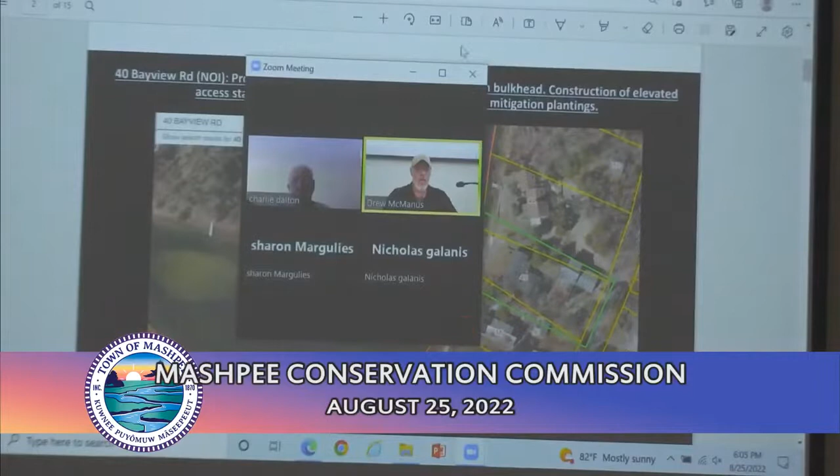I will call to order the first hearing, the 6 o'clock hearing for Kevin and Christine Granfield, 40 Bayview Road. This is a proposed removal of an existing timber wall and replacement with a new vinyl sheet pile wall or approved equal from lot line to lot line, landward of the existing salt marsh and mean high water line, following the original existing wall toe alignment, and to reestablish grades behind the wall with 180 square feet of creeping junipers planted 2 feet behind the new wall.

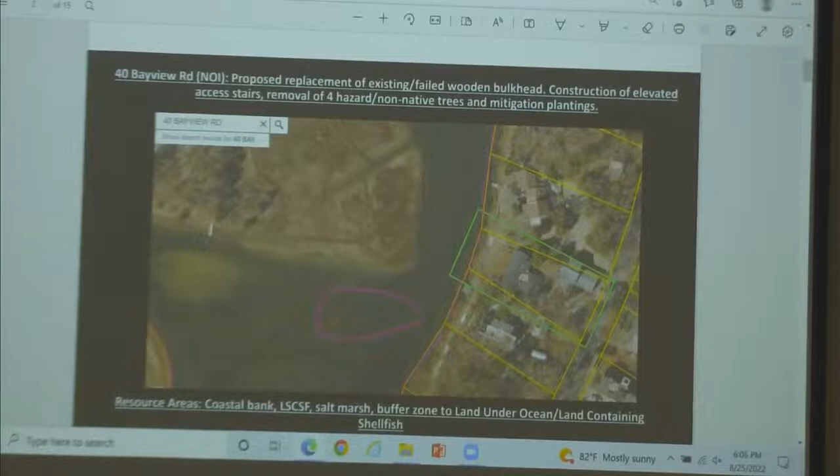All work is above the mean high water. Additionally, remove existing landing, remove and reset ramp, construct and maintain a 4-foot by 20-foot proposed access stairs and landing with utilities supported by a 4x4 post. Remove 2 spruce trees, 1 Norway maple, and 1 pine tree. Representative is Cape and Islands Engineering. This is an NOI. Good evening, sir.

For the record, Raul Lizardi from Cape and Islands Engineering, representing the applicant, Mr. and Mrs. Granfield at 40 Bayview Road. First, I do want to say that there is a notice of intent number issued for this permit. Number is 43-3200.

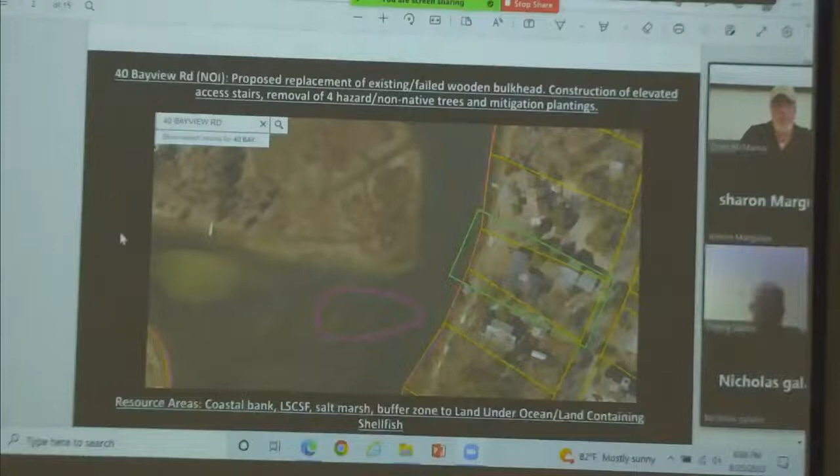This project, the main work is for the reconstruction of a timber bulkhead. For those of you who were at a hearing a couple of years ago, we did a similar reconstruction of a timber bulkhead for the abutter just to the north. So this abutter now to the south, and this application is to continue what was done on the neighbor. These two properties used to have a joint bulkhead.

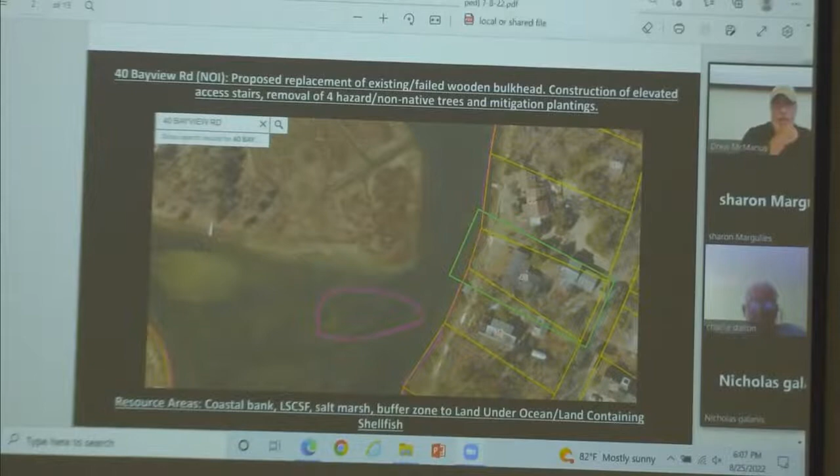It was timber, and after 30 or so years the timber has been deteriorating, and there are sumps or sinkholes happening behind the bulkhead. The bulkhead does not reach mean high water, so this is all happening above mean high water, but there is a salt marsh that comes all the way up to the bulkhead.

The proposal here is to deconstruct the existing timber bulkhead and in its place install a vinyl sheet pile bulkhead with tiebacks every 10 feet. It's similar to the design done to the north. The only difference is the project to the north used what they call the box vinyl sheet piles.

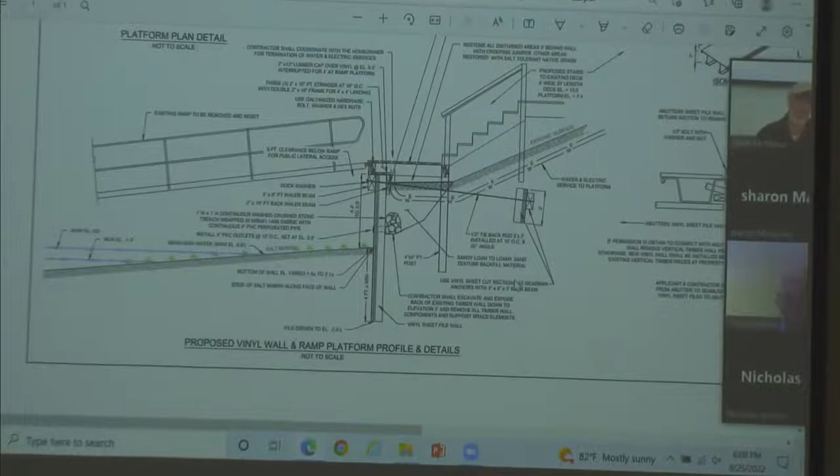Those are the ones that have a corrugated look to them. This neighbor wants the flat face vinyl, so it will look like a straight wall along the front of the bulkhead. In addition, they have an existing 10A permitted float, with a ramp going from the existing top of the bulkhead to that float.

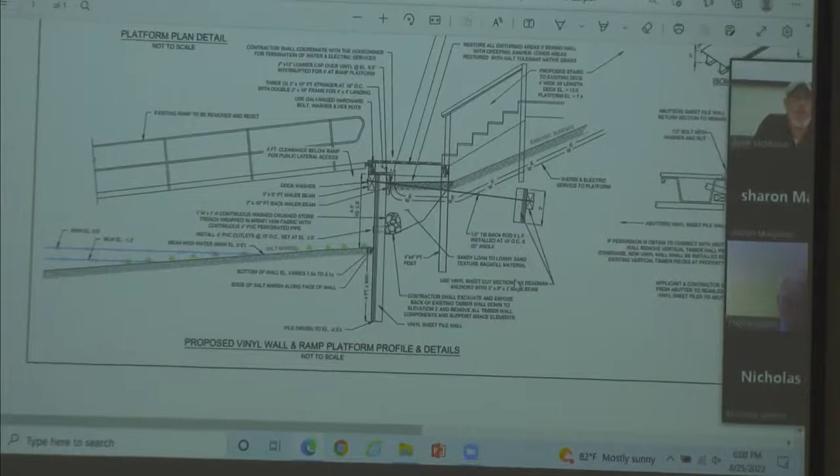What we want to do is reinstall that ramp on top of the new bulkhead, and then towards the existing house, instead of having the homeowners walk down the slope, which is a coastal bank, have an above grade stairs to access from the deck down to the ramp and eventually down to the float.

A couple of improvements also proposed is the removal of the Norway maple that is compromising the house, and there's actually two structures on the property, 2 spruce on the property and a pine that's very close to the house.

There's 2 downspouts on the 2 back corners of the existing house that currently discharge to surface. What we're proposing is to intercept those 2 downspouts with 2 dry wells as an improvement to lessen the amount of runoff going down the bank.

And the first 2 feet behind the new constructed bulkhead, we're proposing to install native junipers. The junipers not only add natural vegetation to this buffer, but also help slow down any runoff making it down to the bulkhead.

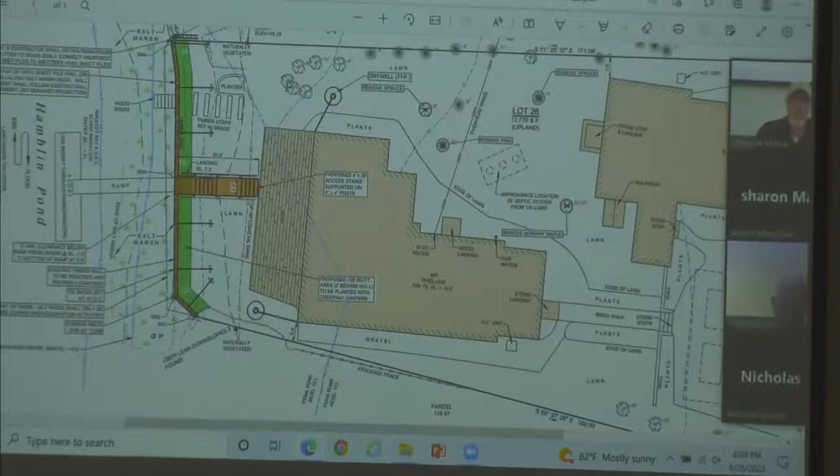Another change this bulkhead is doing: the existing timber bulkhead is roughly at elevation 5 at the top, with some areas at 4.8 and 4.7. We're proposing this new bulkhead to be higher, so the top will be at 6.5, and then from the 6.5 behind the bulkhead, we grade back to existing grades.

If there's any questions, I'll be happy to answer. Thank you.

I'm going to open the questioning and comments up to the commissioners first.

While I'm waiting, these 4x4 posts, what do they have for a foundation? Do they just get set into the soil? Four feet down is the typical installation for a 4x4 post to hold a stair access. That's the typical installation, 4 feet down.

Drew, are creeping junipers something we typically consider a native planting? They are on the Cape Cod, Barnstable Cooperative Extension list of recommended native plants. They're salt tolerant too, so they would be conducive to this location.

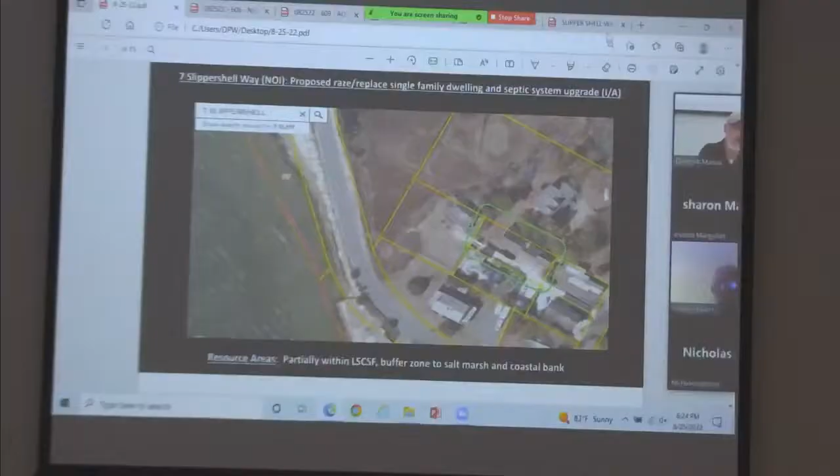So what the applicant is looking to do at this property is raze the existing single-family dwelling, remove the existing septic system, remove the existing parking area, remove the existing patio, and in its place construct a new residence with a new Title V system, innovative alternative technologies, and construct a paved or gravel area for parking over the septic system. The resources within 100 feet of this property is a salt marsh to the north and west.

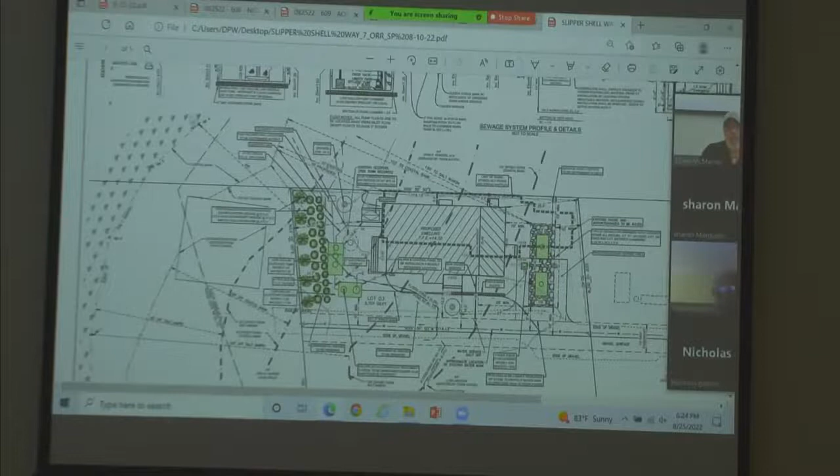There is a coastal bank, not on the property, but on the properties to the north and the west. A lot of the work is taking place within the buffer zones to the coastal bank. There is a portion also taking place within the 100-foot buffer to the salt marsh, but the majority is within 100 feet of the coastal bank buffer.

So the proposed house will not have an increase in bedrooms, so the septic system is not considered an increase in flow. However, this design is using an alternative septic system to enhance treatment to this sanitary flow. In addition, the new house is going to have dry wells to collect roof runoff from this new house.

And all the ornamental plants located to the far west along the 50-foot stretch of the property line are going to be replaced and installed with native trees and native shrubs. It's not the entire 50 feet because a good portion of that is the existing driveway shared with the neighbor to the west. So there's approximately a 12-foot depth of native plants that are going to be located to the west of the property, replacing existing ornamental plants.

The septic system is located as far away as possible from all the resources. In particular, it's located 103 feet from the coastal bank and 130 feet from the salt marsh. So it's at the furthest location we can put a septic system from these resources, compared to the existing septic system, which is a cesspool located within 100 feet of the salt marsh and within 50 feet of the coastal bank.

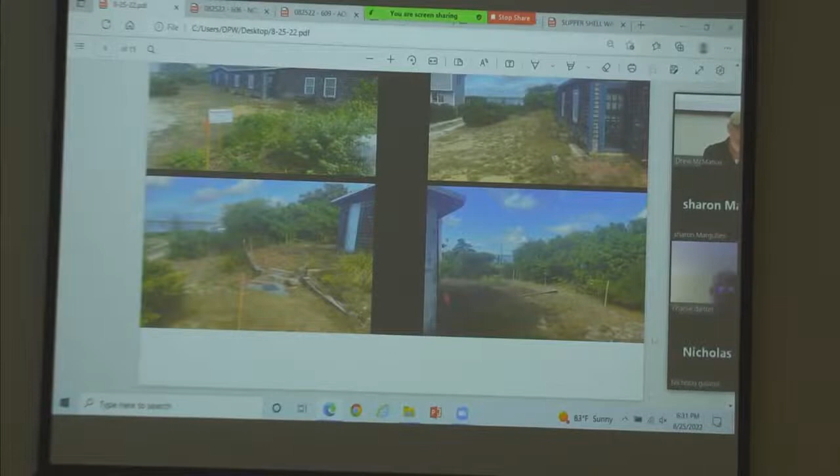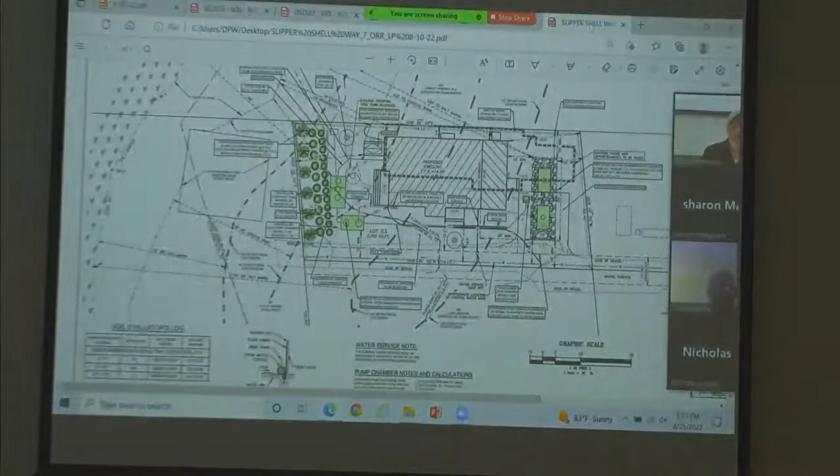This is the area, looking at the bottom right photo, where the mitigation is proposed. It's a bit of an unusual situation in that there are properties in between this one and the actual resource area. So going back up to the satellite image — here's the bordering salt marsh coastal bank area, and this lot is highlighted in green. So it's not directly bordering, but it still lies within that buffer zone, with other developed properties between this house and those resource areas.

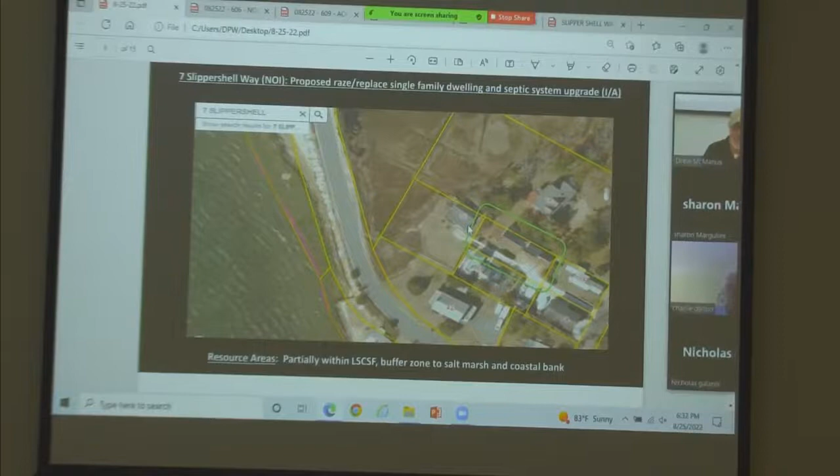So, Board of Health comments: septic plan approved by the Board of Health for a 2-bedroom dwelling. It's nice to see an IA system is proposed. Building comments from the building commissioner: the project will need relief from the Zoning Board of Appeals, per section 174-17.1 and possibly 174-31, so it will need to go before the ZBA.

Mitigation plantings proposed for the alterations within those previously disturbed areas within the 50 to 100 foot buffer to the top of coastal bank. I recommend to close and issue with condition of submission of a 1-year signed mitigation monitoring and maintenance contract with a qualified professional.

As Raul had mentioned, you could do one of two things, because I know there was discussion on the absence of a DEP number for the commission a few meetings back. If you wanted to continue for receipt of that DEP number, or you could close and issue pending receipt of the DEP number. I don't imagine, based on what's proposed, that DEP, when they issue the number, are going to have any additional conditions for this one. It's pretty straightforward, so it's your choice as to how you want to close and issue or if you want to grant a continuance.

Raul, do you have a date for zoning? I don't have it. Chris Corain is making the application, or made the application, but I don't have a date yet. So you wouldn't be able to proceed regardless? Oh, this construction will take a little while after it gets all the required permits. It's just that if we do continue, if it's just for the issuance of the DEP number, is it a matter that you want a representative, or is it just a matter of opening and closing right away? That's why I don't think DEP would have any additional conditions that would warrant the consultant to come back.

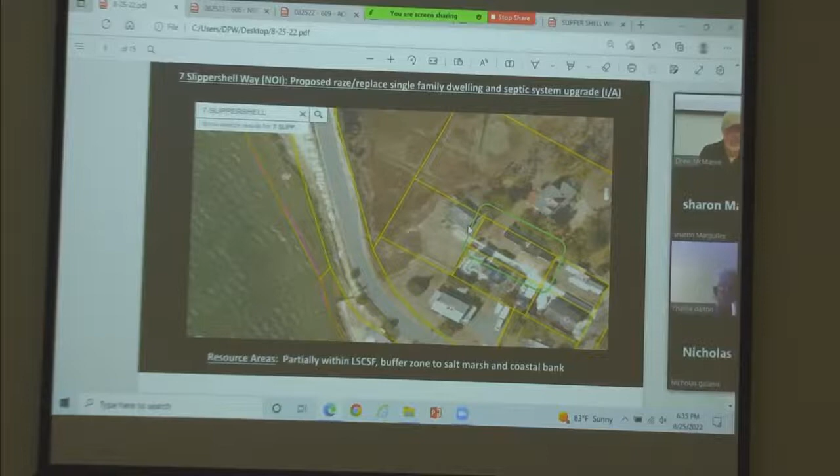I'm going to make a motion to close and issue for Leanna Orr and Jesse Oberst for 7 Slippershell Way, pending the issuance of a DEP number and with the submission of a 1-year signed mitigation, monitoring, and maintenance contract. And if there's any important comments from the state, how do you want me to word this? Comments relative to a discussion? Okay, any relative comments that come back. Thank you, Alex. Is there a second to that motion?

Second. Thank you, Brian. Any further discussion before I call for a vote?

There being none, Tom? Aye. Thank you. Brian? Yes. Thank you. Alex? Yes. Marjorie? Yes. Thank you. Charlie? Yes. Thank you, Charlie. I vote yes as well. Motion carries.

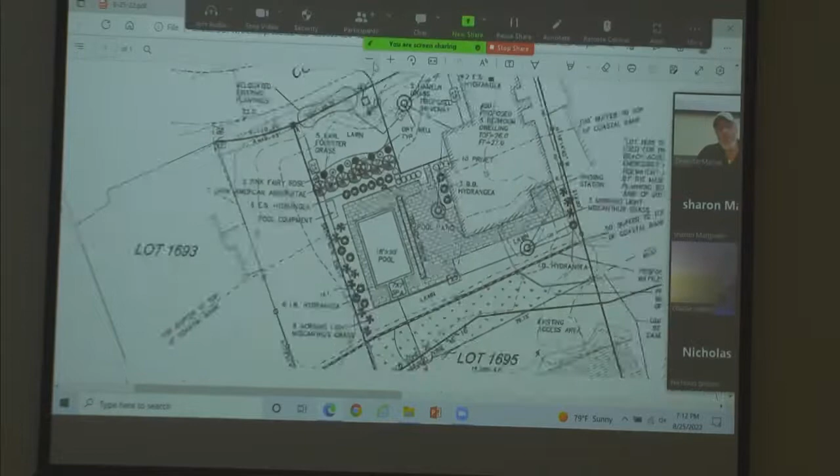So during the last hearing, there were questions with regards to drainage, and we unfortunately had no representation on the one plan that was used at the presentation. I hope this shows now the intent of drainage, that there was drainage planned.

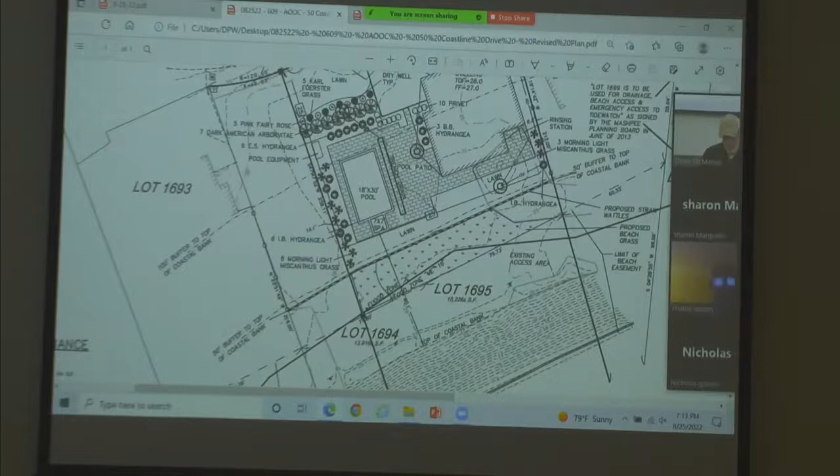Do the commissioners have any questions? I'm sure some of them will. Is there anything else you'd like to say before I ask them? Okay, thank you, no. I'll turn it over first to the commissioners for any questions or comments based on the new information that's being presented this evening.

I would just say I'm not really thrilled with the planting plan. There are 9 out of over, I think, 50 plants here that are native, and they're the shamrock variety. So there's not really a good faith effort to put native plantings here.

Well, I knew that would be your concern. The homeowner has not definitively decided on plants. These were drawn in, especially in the 50-foot area and by the pool side, as hydrangeas and the miscanthus. And the homeowner is agreeable to native plants.

Okay, so I would say anything within the 100-foot buffer should be native. There are beautiful natives that can be poolside that'll look good. I printed out the list, and the homeowner has not been fixated on having the hydrangeas that somehow were drawn in, and they neglected to make that change from the last meeting to this meeting. I apologize for that. I knew that was something that was a hot issue, and I apologize it wasn't addressed.

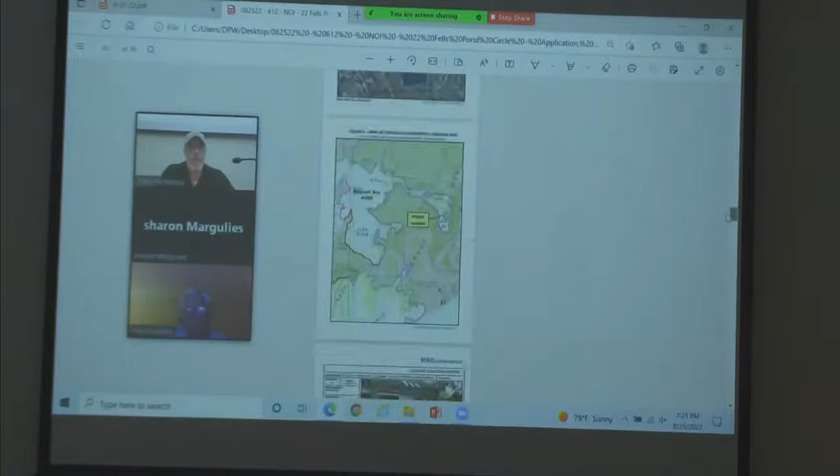These are pretty modest additions. In your packet we've got a set of architectural drawings by Tim Luff's company, and the property site plan there is by Warwick Associates.

The resource areas on the site are those associated with, it's actually not Fells Pond - I noticed on the plan it says Fells Pond, but it's actually Jehu Pond. We've got an inland bank, which I demarcated, and its buffer zone extends well into the house footprint landward of where the work is. There's also the coastal flood zone that extends onto the property - no work in the coastal flood zone is proposed other than mitigation with native vegetation. The ACEC for Waquoit Bay also extends onto the property - you can see that line that kind of bisects the house.

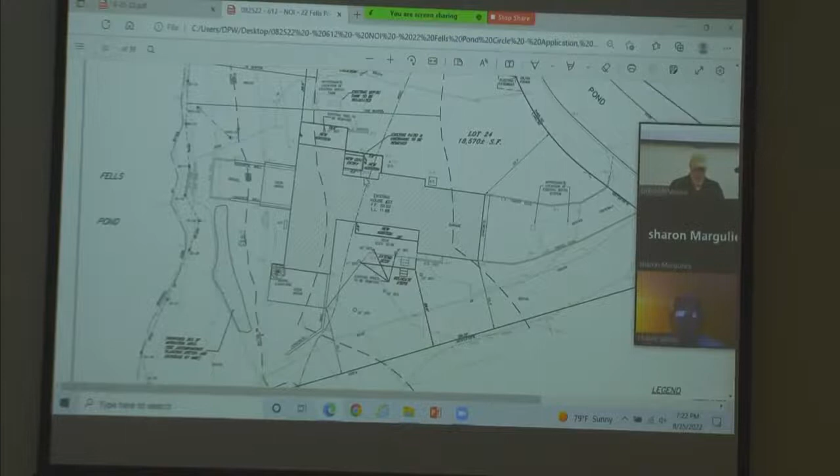So the structural additions are occurring on the northwest corner. There are some modifications and a small addition at the existing entrance of the house, mainly over existing hardscape, gravel, and stepping stones. And then on the other side of the house, they're bumping out the house footprint by 4 feet and extending the deck out over an existing landscaping bed. So they're keeping the size of the deck intact pretty much, but just adding a little living space there.

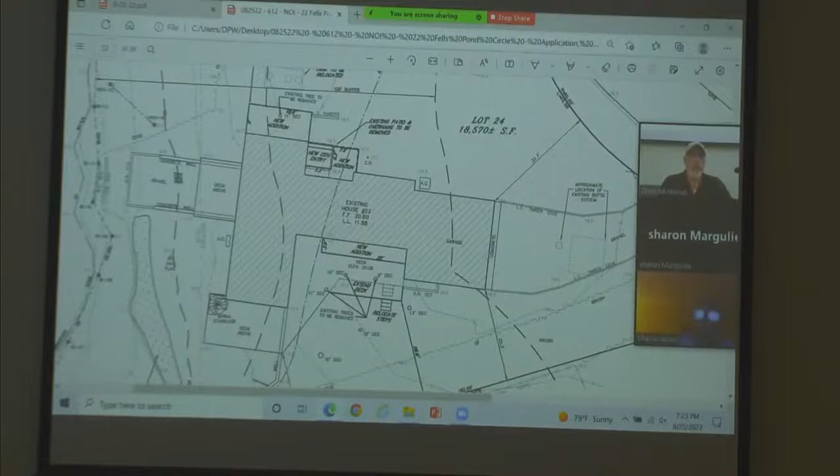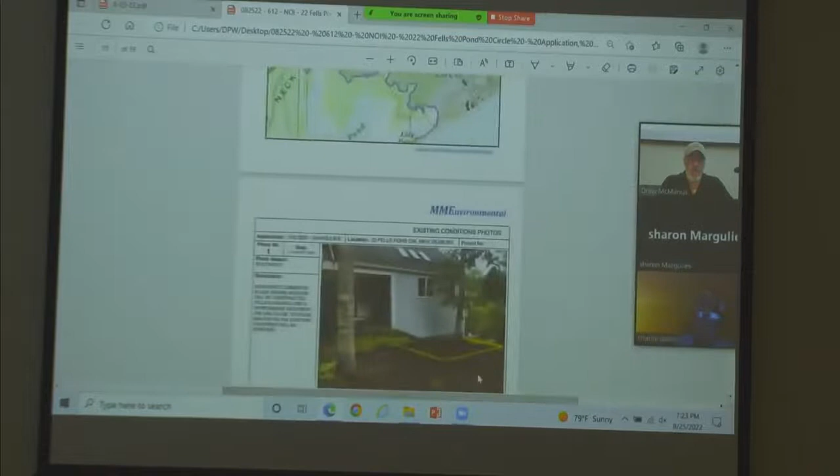If you've been to the site, you'll see that there are 4 oaks growing up through the deck, and they would like to remove those trees. You can see in photo 2, those 3 trees - those are scarlet oaks, they'll be removed as part of the project. On the northwest corner there's 1 oak - I've shown an approximation of where the footprint will extend to, and you can see that 1 oak will be removed.

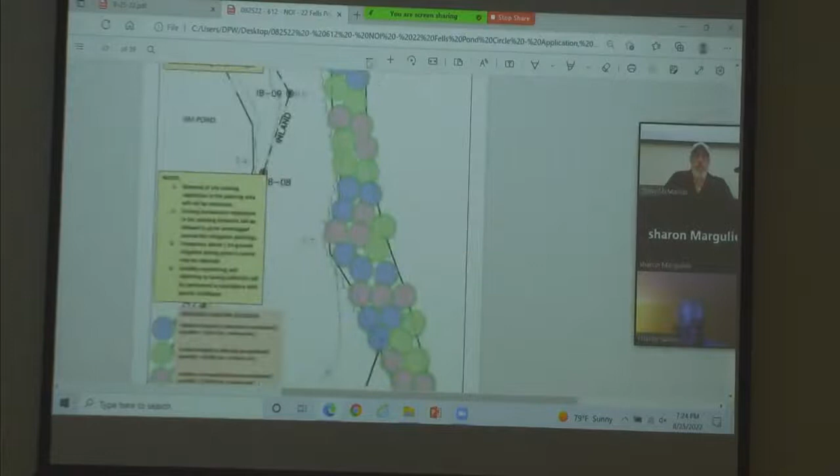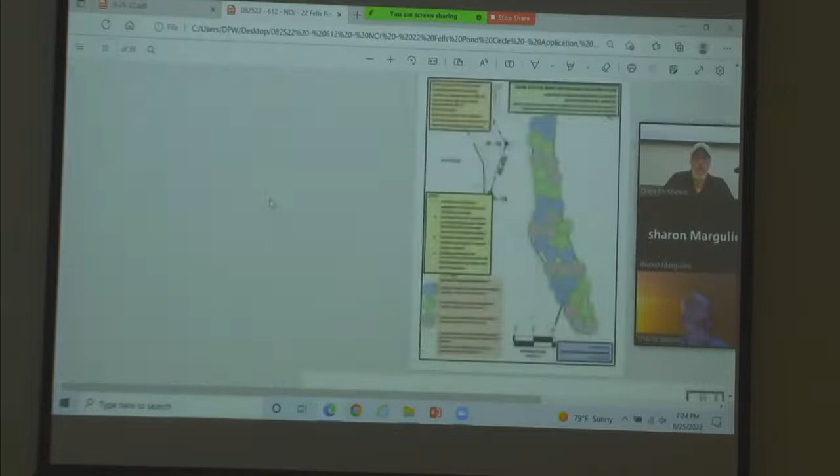For mitigation, in order to meet your bylaw requirements, I've drawn as a separate exhibit a planting plan that proposes 265 square feet of native plantings. That'll be located adjacent to an existing wooded buffer zone adjacent to the pond. I've included 3 different species in that planting plan, totaling 34 plants - high bush blueberry, northern bayberry, and northern arrowwood, all species that are currently occurring in the buffer zone, so they should be fine there.

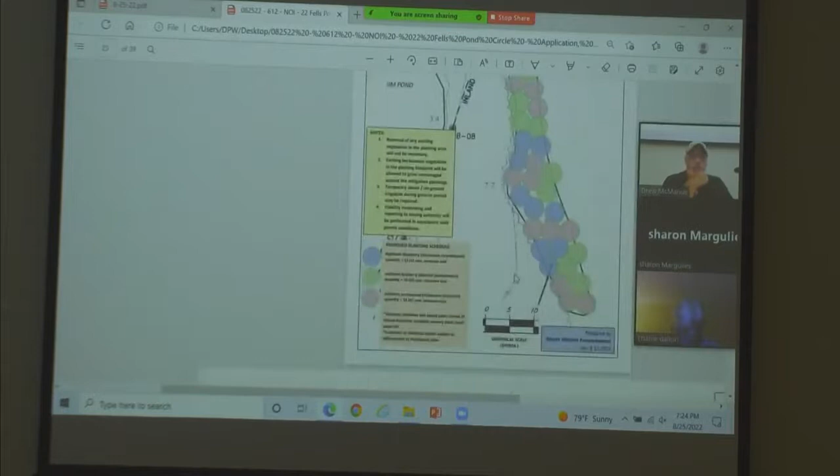In that area currently, you'll see in photo 3 or 4 that the area is probably not well managed, just a bit of unmanaged lawn, and so that area would be filled in with native plants, allowing access around that side of the house. So I think that's all I have. I do think this project, as proposed, meets your bylaw requirements and serves the interests of your bylaw and the act.

I'd be very happy to take any of your questions. Thank you.

Nice graphics in the presentation. Oh, thanks, yeah, looks really nice. Questions and comments from the commissioners?

Is the septic being relocated? A portion of it has, and that has been approved by Board of Health. Okay, so that's not part of this current proposal? That was not the part of this I had - I wasn't sure if that was part of this. Yeah, it's not.

Have we already approved, have we already seen a filing for the septic? Wouldn't we normally see one? Off the top of my head, I couldn't tell you, I'd have to go back and check. Pete McEntee of Engineering Works, I know he's been handling the septic aspect of this, and I know Board of Health has reviewed it. I just don't know if he's been before you to approve that move.

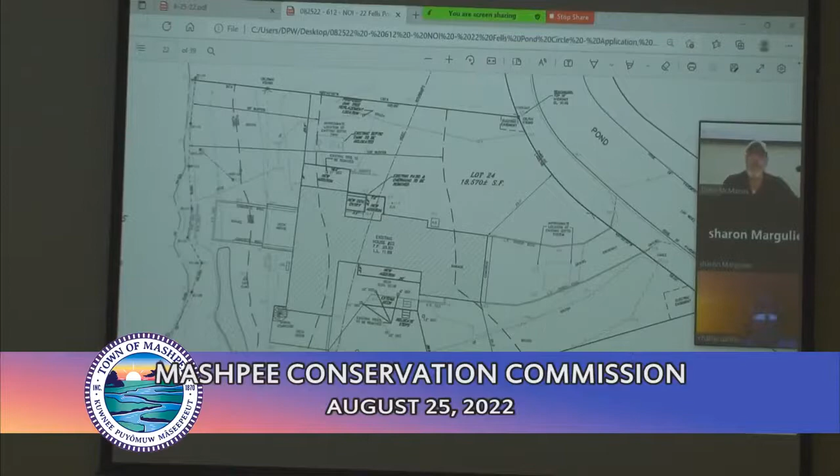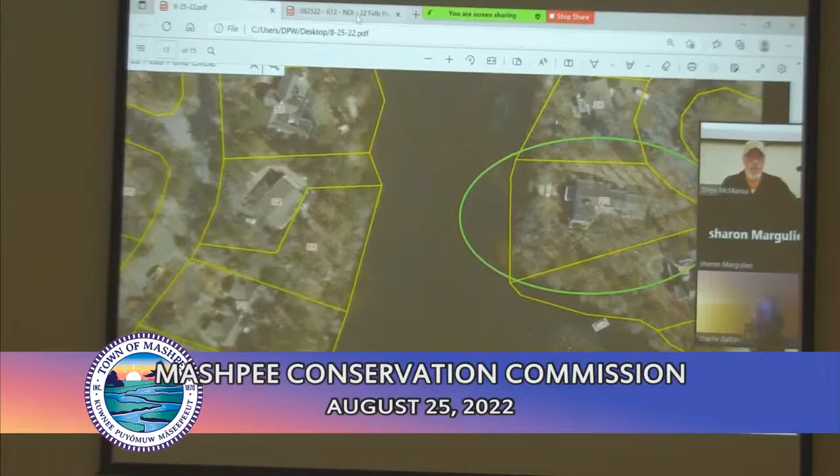This is not one of those properties where you have a lot of lawn area. Right, it's pretty well unmanaged. Yeah, those are good photos.

Any other questions? Charlie? No, I'm all set. I'd ask the audience, but there isn't one any longer, so Drew, I'll turn it over to you.

Not much to add here. The only comment I had, which will be investigated, is the relocation of the existing septic tank denoted on the plan, which Mike has clarified has already been done, so we'll look into whether that was covered with a permit or not.

And then just the 3 oak trees coming out of the deck, that's a pretty common situation in New Seabury where, the way I looked at it, it's just an automatic hazard. They're growing right over the roof, and I always cringe when I see that situation because it's an accident waiting to happen. There's so much debris that falls on the roof, they should be removed from a risk standpoint. That's why I didn't comment on any mitigation for those, just because of their proximity to the house.